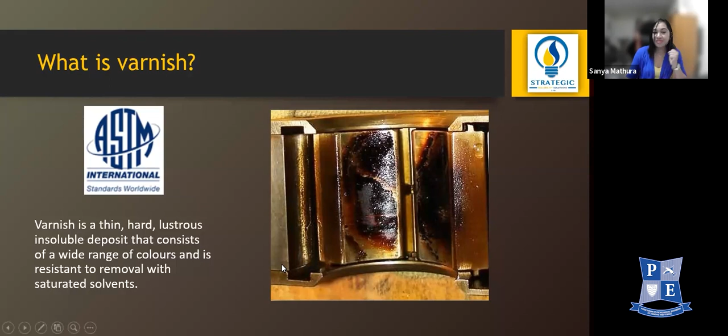So within our industry, every single time we have some sort of a deposit, somebody immediately says it's varnish. So just to let you know, there is a full definition for it. ASTM, they've talked about it. Now, people, I wouldn't say confuse really, but they kind of use the words varnish and sludge interchangeably.

So what we like to try to do is sort of define the two of them. One of the main differences between varnish and sludge is that when you have varnish being deposited on the inside of the equipment, you can't remove it as easily. But with sludge, you could probably wipe it away.

So there are times when people, especially operators or mechanics or anybody else in the industry, say, we have some sludge. But at the same time, it could be varnish. And then some people say, well, we have some varnish, but it could be wipeable, so it may be sludge. And it's very important to really know the difference between the two of them, because if you don't know what you're labeling it as, then you're not going to be able to treat it.

And this is a really bad example that I'm going to give here, but you can't say, I had a headache today versus I had a heart attack today. They are two different things, and you would have to be treated differently. I'm not saying that varnish and sludge will give you a headache or a heart attack. Hopefully not, but they are different. So just bear that in mind when you're talking about it.

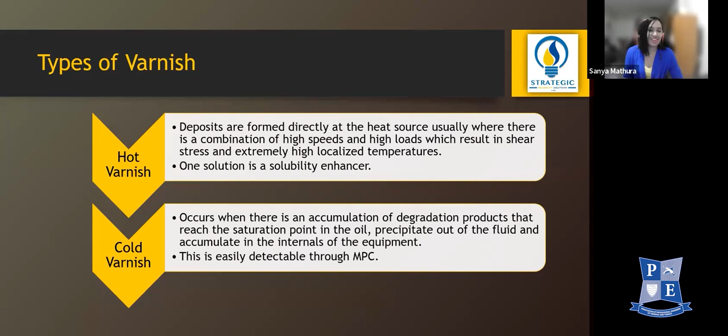Now, I want to ask, and Darrell or Leslie, you all will help me out. Within our industry, and I remember because it was around the time I first started in the industry, a lot of people began saying that group 2 base oils were completely responsible for varnish occurring, right?

So I went to, I'm not going to call the name of the plants, but I went to a couple of the major plants in Trinidad, and a lot of them were like, yes, it's because we have the group 2 base oils. And that's the reason we have varnish occurring in our equipment, because we had group 1 base oils before and we had no varnish whatsoever. But since they did the switch over to the group 2, that's when they started to see varnish occurring.

And I remember very distinctly that some of them were trying to get back the old formulation of the product with the group 1 base oils, because they were so convinced that it was because of that reason. That's why all of the equipment started to have varnish.

So I'm just going to ask the audience, do you think that there's any truth that the group 2 oils are responsible for the upsurge in varnish? Let me know in the chat. Darrell and Leston, you'll have to help me out there. Yeah, no problem. Everyone, you could type in the chat. Yes, please type in the chat. Truth or myth? Yes or no? Because I remember that time, and a lot of people were very upset that there was a change to the group 2 base oils. So I'm gonna give you all a few minutes to think about that a little bit.

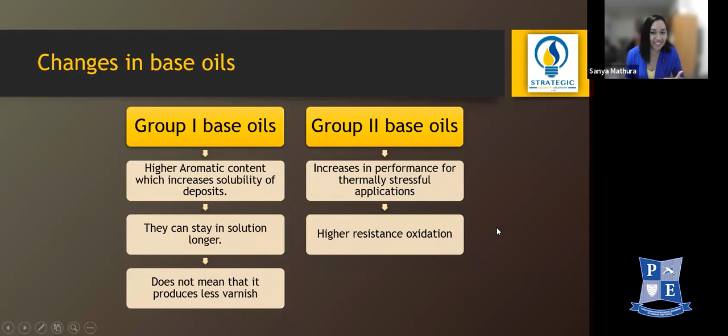It's a myth. What happened is that Greg and the team at Fluitec actually performed a turbine oil performance prediction test. That is a mouthful. And that's based on the stress conditions that you would use in a dry TOST test, and that's like pushing the oil until the point that it cannot do anything else.

And what they realized is that with your group 1 base oils, just after 4 weeks, this is what your MPC patch looked like. However, your group 2 base oils took about 12 weeks in that same test to get to this state. So initially, when varnish started to occur, everybody was looking for a factor to blame, somebody to blame, and David gave a great response.

Thank you, David. So it's really not because we had to change from group 1 to group 2, because we've seen a group 1 versus a group 2 base oil after it's gone through this testing. And yes, the additives would have changed as well. So there's a lot of evolution within the industry.

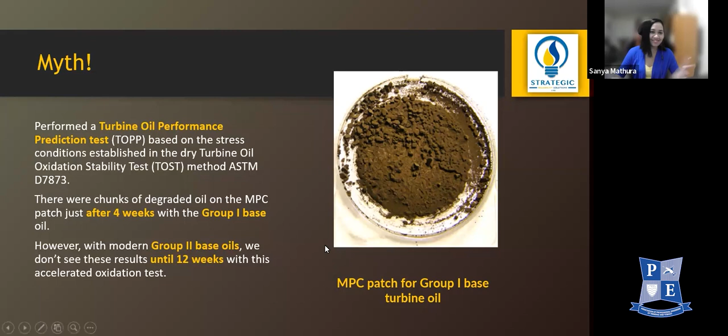So for everybody who said no and who said a myth, well done. We should let you all run the presentation because you all know this stuff.

Now, another thing that we always talk about is organic and inorganic deposits. One of the main reasons why this matters is that you need to know the type of deposits happening in your system, because if you know the type of deposits, you can actually determine the type of degradation going on in your system.

So there's a difference between your organic deposits and your non-organic deposits. You can also classify deposits as water or lubricants as well. For your organic deposits, I'm not going to read out the list here for you; I know you all can read that. But there is a difference, and being able to detect that could tell you if you're having oxidation or thermal degradation. So that's one of the things, when you have varnish occurring in your system, that you want to determine early on.

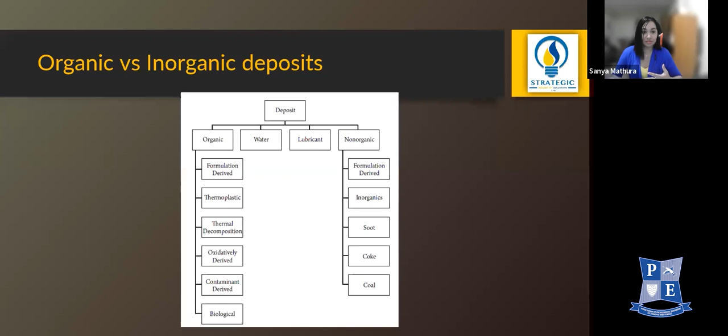So just trying to break it down a little bit further, your organic deposits are usually soluble in the lubricant and they can easily transition in and out of solution, but usually that's based on your oil's temperature. Now I have the same list of stuff that we had before. Non-organic deposits, though, are usually your wear metals and dirt.

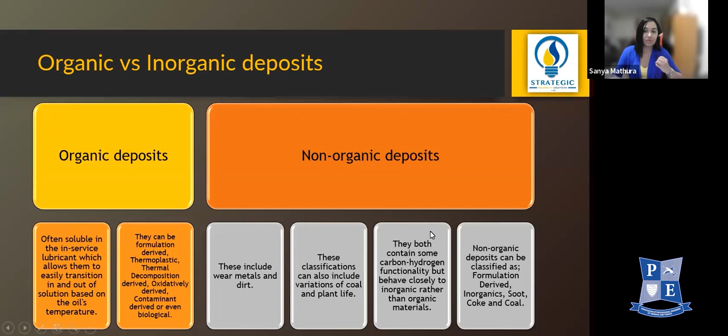What I want you to think about here is that you can also have some sort of carbon-hydrogen functionality with them. When you have different variations of coke or soot or tar, these non-organic things, most of the time there may be thermal degradation happening. So being able to identify the difference between your organic and non-organic deposits can help you determine what's going on with your system. Very important for you to note.

Now, another one. I'm just doing this in the form of questions. What are some of the factors that can affect the formation of deposits? A lot of times we get asked this because operators say, okay, we have varnish occurring, what can we pay attention to? If you have varnish occurring, you need to be paying attention to a lot of things.

But there are four main factors. You need to know your mode of degradation, the temperature of your reactions, the type of contaminants, and the chemistry of the oil formulation. These are all things operators need to pay attention to, because if your deposit is forming, you need to know how you can actually treat it.

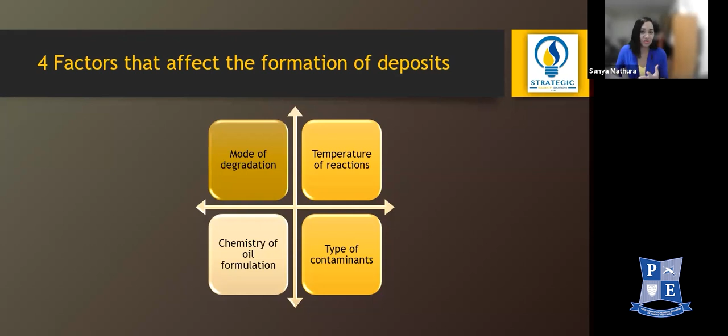So if you're looking at your mode of degradation, and for those of you who know, I love to talk about the 6 different modes of degradation, being able to assess the degradation mode helps you identify it. If we have oxidation occurring in the system, then we're looking for free radicals being formed, or things like the antioxidants being depleted early.

And knowing that means that we need to understand why, in the first place, your free radicals are being formed. Why are they depleting your antioxidants? Is it that you don't have enough antioxidants in your oil? Is it that because of your system, you're having more free radicals being formed? Or is it that you're having a catalyst in your system?

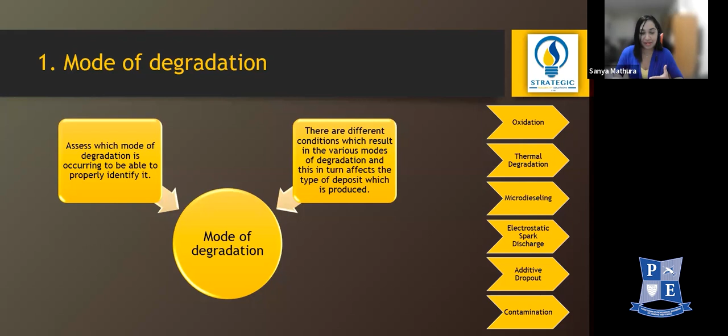So, we could talk all day about this, but understanding the mode of degradation is important in terms of identifying what's going on. And that starts with your deposits as well. So something for you to note. And when we talk about varnish, we always talk about temperature. So you need to note what's the temperature of your different reactions.

So if you start noticing different changes in your temperature, sometimes a lot of people see a sawtooth pattern of temperature. That could be when you have varnish being accumulated on a shaft and the temperature would keep going up because it's insulating. And if it's on the shaft, it may get to the point where it becomes wiped away, and then you'd see a temperature drop.

And then it starts building up again, and then it gets wiped away, and the temperature drops again. I remember very clearly working with some of our clients in Trinidad, and they were like, I don't understand what's going on. Why do we have a sawtooth pattern of temperature? That's not supposed to happen. So it's very important to note your temperature, especially of your reactions.

Because if you start seeing temperatures, let's say in excess of 200 degrees Celsius, you can suspect that you have thermal degradation going on. If you start seeing temperatures more than 1,000 degrees Celsius, that may be microdieseling. More than 10,000 degrees Celsius, you probably have some sparks in your equipment, and you may want to check your filters for being burnt. So temperature is very important when you're thinking about varnish.

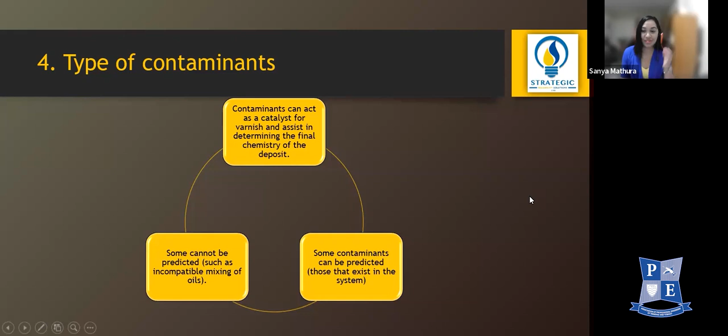So contaminants, you need to know what contaminants you have in a system. They highly influence the type of deposits that you're gonna get afterwards and the amount of trouble that you probably have afterwards as well. So another thing a lot of people ask when it comes to varnish, and I know we talked about it initially, we talked about the temperature being very important. Now, sometimes in these systems, there are three main things that I want to say help to control your temperature.

So your deposits will come in and out of solution, especially for those who are doing, I know we're entering shutdown season in a little while, but everybody's going to be shutting down. And when they shut down, what happens is that the oil gets cool and deposits start coming out, and nobody checks the lines before they start back up. And then they realize, we have some varnish in there afterwards.

So one thing to note as a side note, always check all of your lines. If you are shutting down and your oil is remaining in that system, there may be a tendency for varnish to form. So it usually forms on the cooler areas, and especially those last chance filters. Those are the ones that get it the most. So even if the oil is not cool and they're under high temperature or high load, deposits will come out as well. So just something for you to look out for.

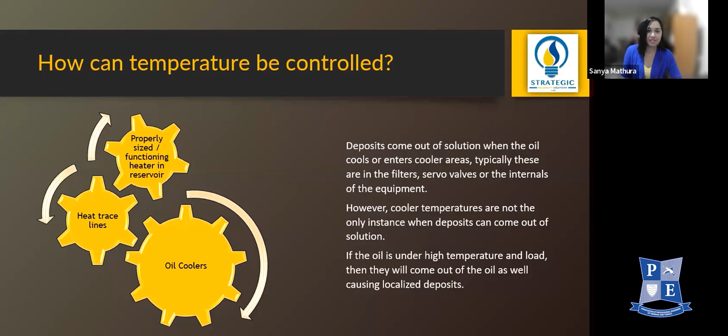All right. Now, we always get a question about what is the budget-friendly test that we can do for turbine oils to try and monitor their degradation. Well, the short answer to that is that I don't know what your budget looks like, but if the turbine goes down, you're going to find the money somewhere to get it back up and running. So paying for oil analysis tests is not much compared to getting your turbine to go down for a day and you have everybody on your back saying, when are we going to get the turbine up and running?

So a loss in production, especially in the power sector, can cost you millions compared to just putting the extra few $100s at the end of the month, or 2 or 3 times for the year, depending on the type of test that you're doing, to actually make that investment towards monitoring what's going on with your oil.

And it's similar to, I really don't want to use these analogies, but it's similar to taking blood tests or checking up on your cholesterol throughout the year. So you may do that as a yearly test, or some people who are more prone to it may do it twice for the year. You don't want to wait until you get a heart attack to go and test to figure out if you have cholesterol or not.

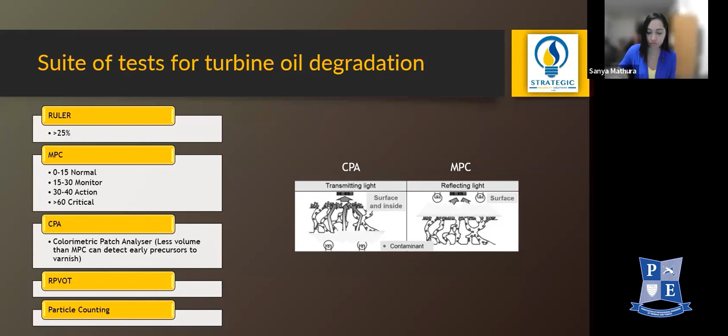So, for example, Jamie Gallagher is asking, do you have any examples of the MPC patches to show different limit ranges color-wise? Oh, right. The colors are going to change so much, Jamie. It depends on what type of deposit it is. Well, he wants examples. So that's something that could be covered via email.

I have a question, a spin-off from your training, right? With regards to training and knowledge base and learning resources, is there any learning resource center where you could learn about varnish in further depth from your presentation that could lead to possible certifications, the ICML certifications with varnish? Yes, you have the varnish badges. The varnish badges are a great source of information if you want to find out more about varnish.

The book that Greg and I wrote actually covers a lot about that. It covers content for the exam in addition to a little bit more, and we have some case studies in it. I think I had the book at the beginning. It's called Preventing Turbomachinery Cholesterol, The Story of Varnish. And in that book, we actually have some questions at the end, which are like sample questions for